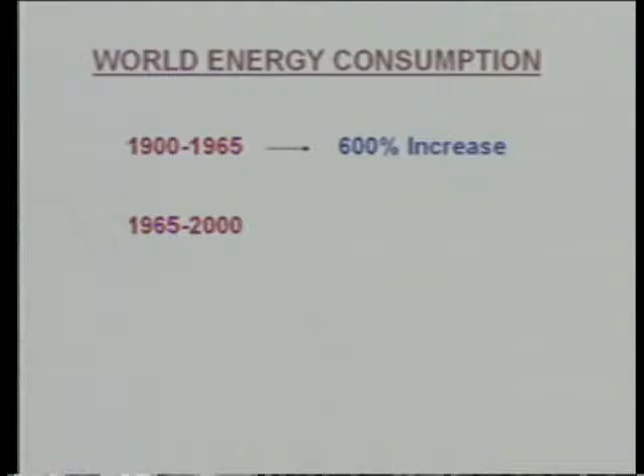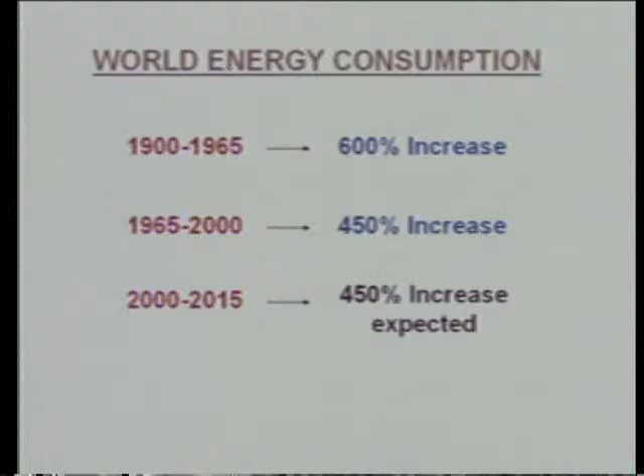Now let us see the world energy consumption. Between 1900 and 1965, there is a 600% increase in consumption. Between 1965 and 2000, that is in a period of 35 years, there is a 450% increase. Between 2000 and 2015, there is an expected increase of 450%. From this, we know that within a 15-year period, we are expecting a very large increase in energy consumption.

Now let us see the countrywide energy consumption. USA, Western Europe and Japan are consuming 60% of world energy. Russia, Eastern Europe and China are consuming 30% of world energy. The rest of the countries are consuming only 10% of world energy. India stands at below 10%. You see here, the major chunk goes to USA.

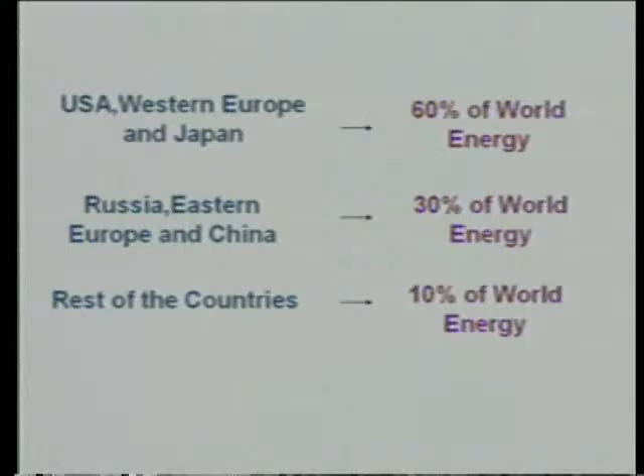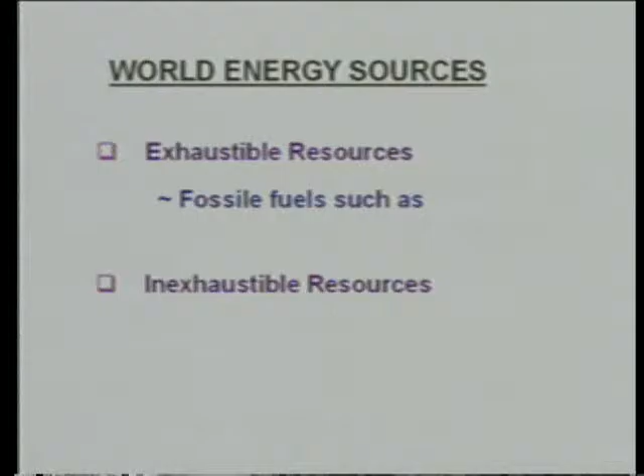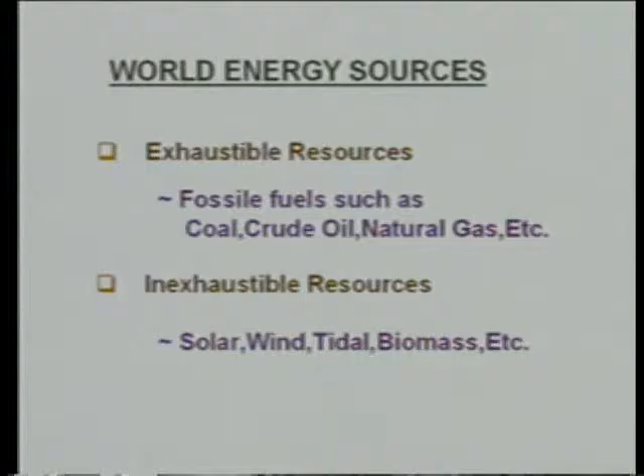Now, let us see the world energy sources. There are exhaustible resources and inexhaustible resources. Under exhaustible resources, fossil fuels such as coal, crude oil, natural gas, etc. are there. Under inexhaustible resources, solar, wind, tidal, biomass, etc. are there. Now, let us see the exhaustible resources availability in the world.

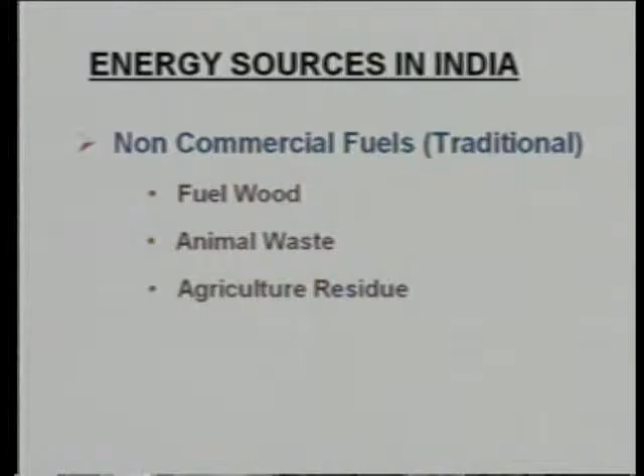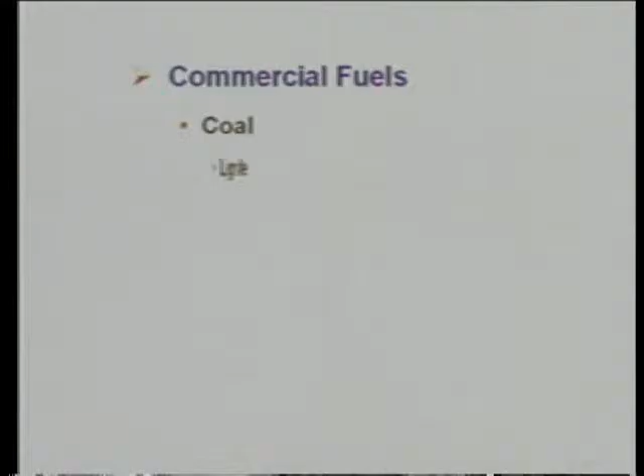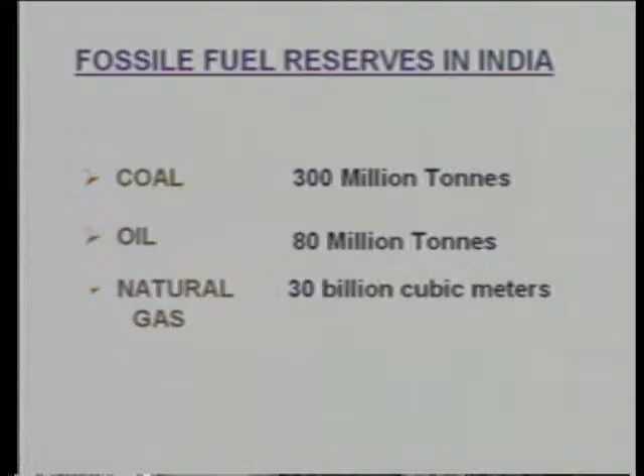Now let us see the fossil fuel reserves in India. If you take fossil fuel reserves in India, coal is having 300 million tons, oil 80 million tons reserves are there, and 30 billion cubic meters of natural gas resources are there.

Now let us see the share of energy demand in India. If you take coal, for meeting energy demand in India, coal is contributing almost 32% for energy generation. Hydro and nuclear 25%. If you take natural gas, it is contributing 21%. If you take crude oil, 4.2%. So out of all this, coal is contributing much more for generating power, and the remaining 2.5% comes from renewables.

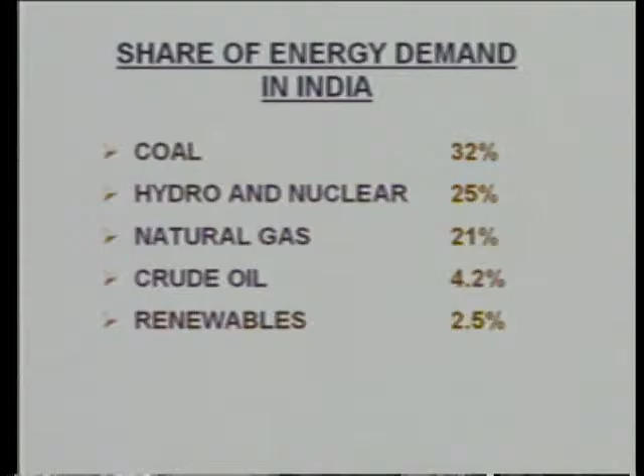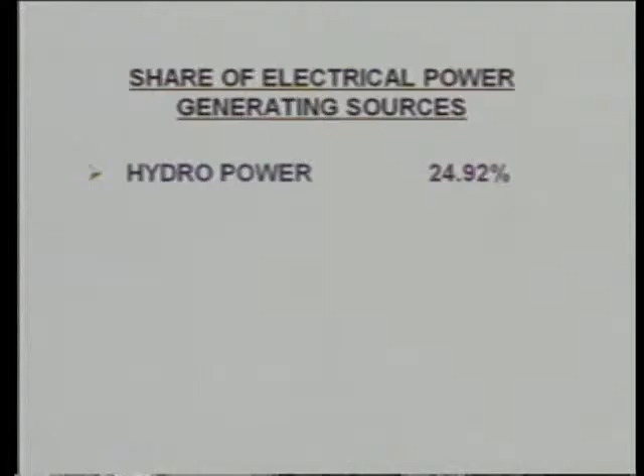Now let us see the share of electricity power generating sources. Hydropower is producing almost 24.92%, thermal power 70.95%, nuclear power 2.52%. So out of these, thermal power is leading, it is producing almost 70.95% of electricity generation in India. You see here wind and other renewables producing 1.61%.

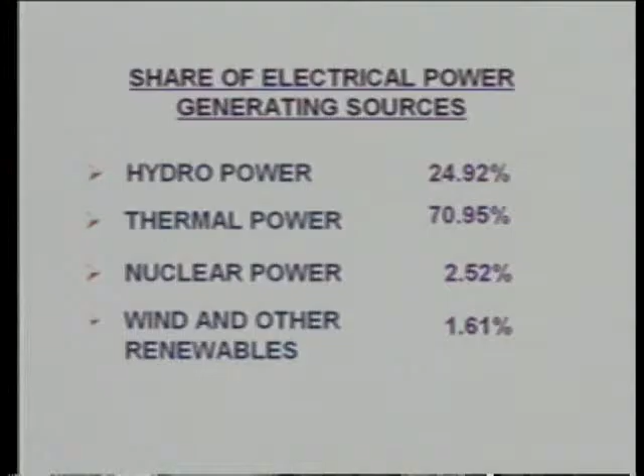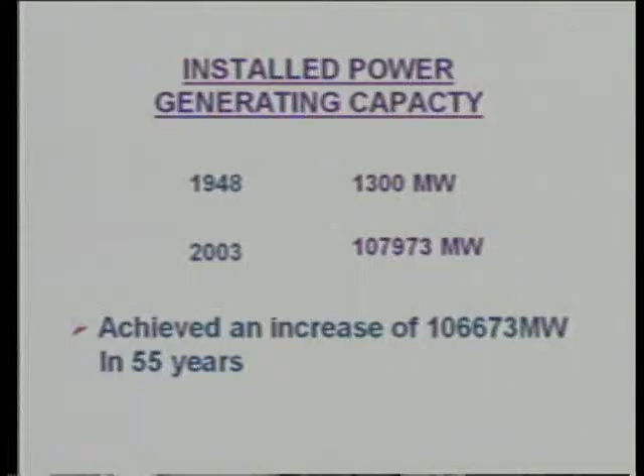Now let us see the installed power generating capacity. During 1948, our installed power generating capacity was 1300 megawatts. In 2003, it is a whopping 1,07,973 megawatts. So we have achieved an increase of 1,06,673 megawatts in 55 years. In just 55 years, we have achieved this much of generation.

Now let us see this table. From this, you come to know the installed capacity as on March 2001 and the various power generating sources here. Thermal power, we are producing 61,157 megawatts, diesel, LNG, gas almost 11,000 megawatts, nuclear 2,720 megawatts, hydropower 25,116 megawatts. Totally, it contributes as on March 2001, 1,00,010.

During the period of 2001-2012, the Government of India has fixed the target production in the thermal category at 53,333 megawatts, and gas, LNG, diesel we have targeted to produce 20,408 megawatts, and nuclear we have targeted to produce 9,380 megawatts, whereas hydropower 32,673 megawatts. So totally we have targeted to produce in these 10 years, that is during the period of 2001 to 2012, 1,15,794.

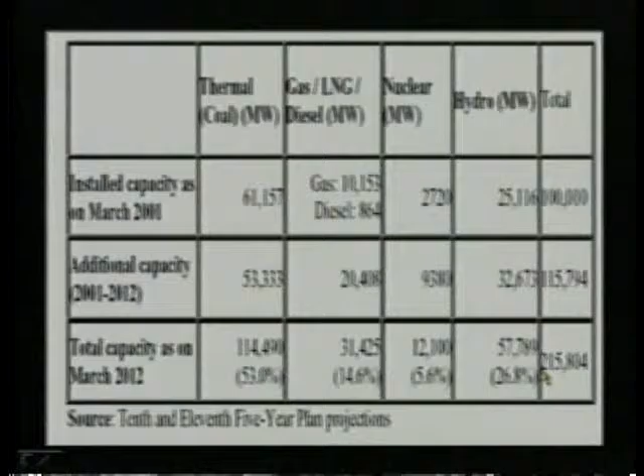So total capacity as on March 2012, thermal we have targeted to produce 1,14,490 by 2012. These figures are 31,425 megawatts gas, LNG, diesel contribution. We have targeted 12,100 megawatts for nuclear, whereas hydropower 57,789 megawatts we have targeted. Totally we have targeted by March 2012 to produce 2,15,804 megawatts power. These figures are based on 10th and 11th planning projections prepared by the Government of India.

So what we have achieved in 55 years, we have to achieve within 10 years. You just imagine how much energy resources we require. But as far as India is concerned, our energy resources, that is exhaustible resources, are fast depleting. And the known oil and natural gas reserves in India are estimated to last within 20 years, and uncertain rains and deforestation have become a threat to the hydel projects in India.

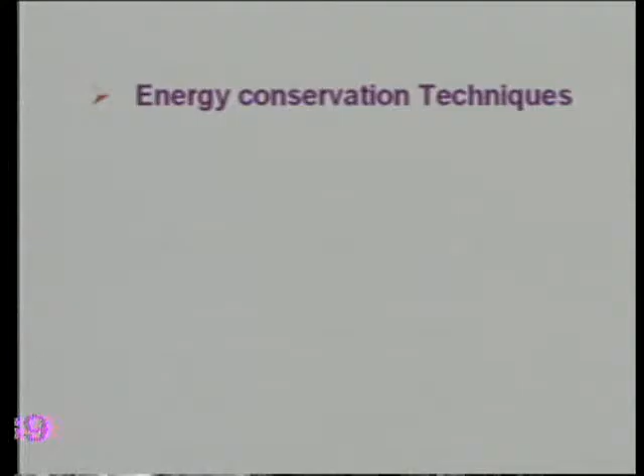We have the consumption of 150 million tons of firewood, but our capacity to produce firewood is only 60 million tons. Where is the remaining 90 million tons coming from? We are going to forests, so there is a danger of deforestation, so we are really in an energy crisis. What we have to do to meet the situation? We have very few options left. The leftover options are, please see here, energy conservation techniques, effective and efficient utilization of available energy, avoid unnecessary energy wastages, use renewable sources of energy.

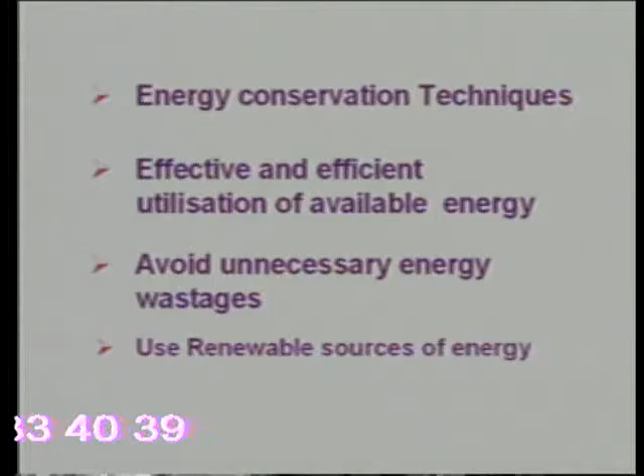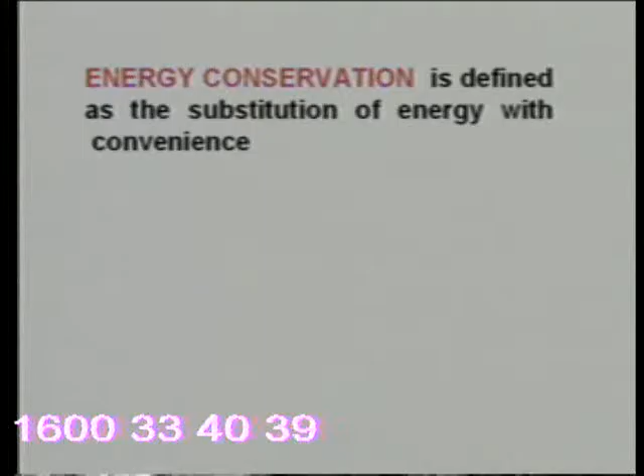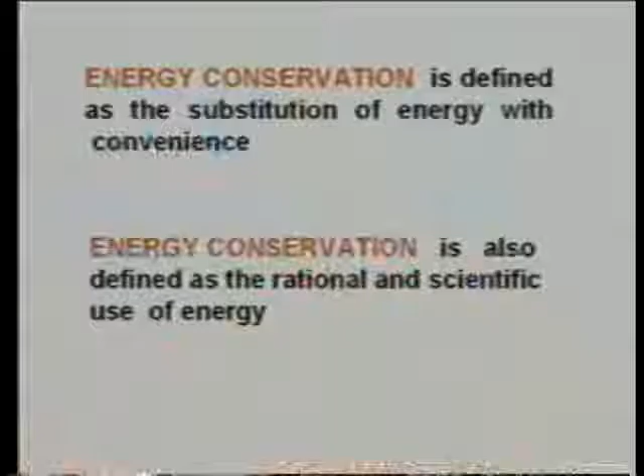Now let us know energy conservation. So what is the definition of energy conservation? Energy conservation is defined as the substitution of energy with convenience. It is also defined as the rational and scientific use of energy. For example, a group of people are sitting in an assembly hall. Before leaving the hall, they fail to switch off the fans or lights there. If we do not put off these lights and fans, the power consumed by them will be wasted. This type of energy wastage we have to avoid. So this is one type of energy conservation. I have just told an example of energy conservation.